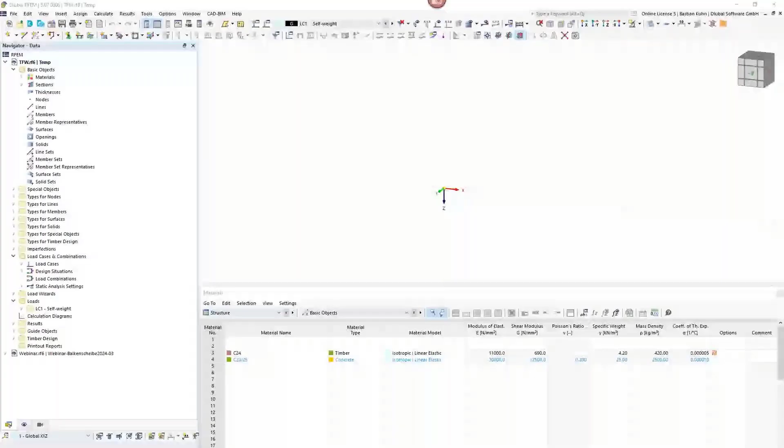Looks quite good. Okay, before I start modeling this timber frame wall, just as information for you, my colleague will probably share the link with you. The model I'm doing here has been analyzed and calculated by hand on our knowledge base.

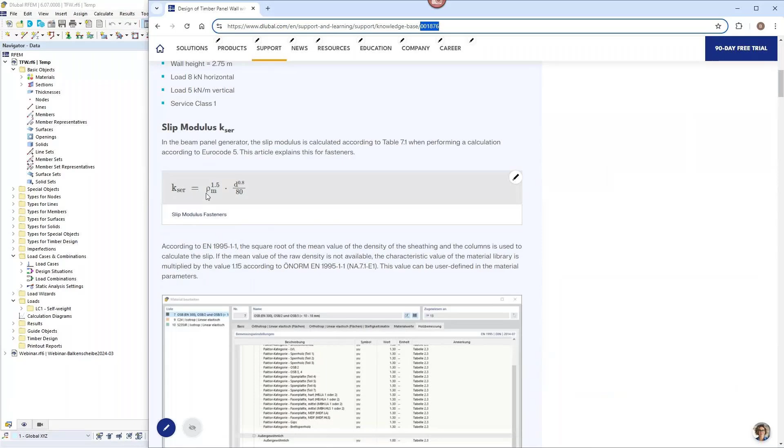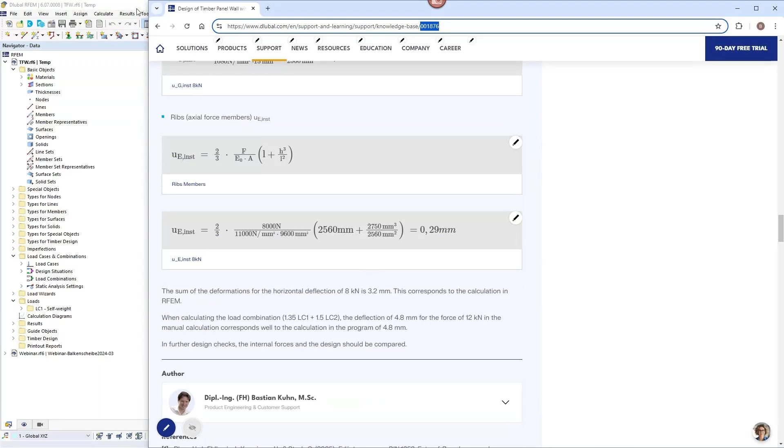You can find it by the number 001876. There you can see the formulas lying behind it, and also the deformation, and of course the inner forces are calculated with hand formulas or equations. Once I've generated the model, I will take a look back at the homepage to show you what we are doing here.

Before we create the model, we have to give it a model name: timber frame wall. I will choose type of model 3D here. In RFEM 6, one of the advantages compared to RFEM 5 is that every design add-on is completely integrated into the software, not a separate add-on anymore, which has a lot of advantages for speed and design purposes.

So I can choose what I want to build or plan here. What do we want to do in this first simple structure? I mentioned we will create a beam panel, so we would need the multi-layer surfaces add-on. We don't need the load wizard, and we don't really need the combination wizard either, but it doesn't matter. We will do the timber design in the timber design add-on.

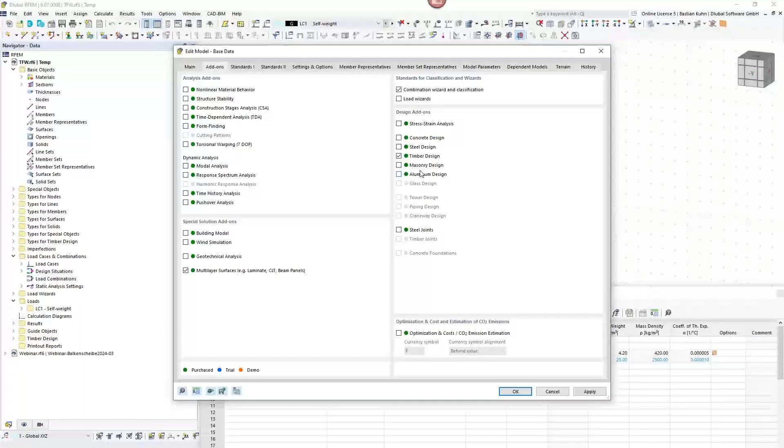Looking at the third register in the basic data, we will have the standards here. We are calculating according to the timber Eurocode, and it's also possible to calculate according to the American standard, Canadian, and a whole bunch of others, even Chinese is possible for timber design.

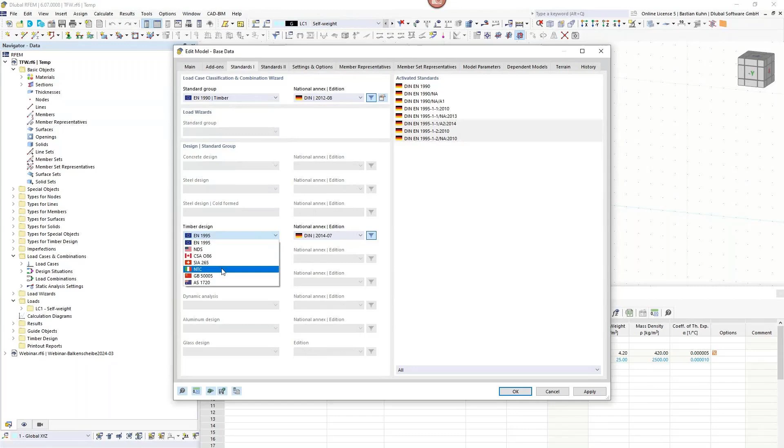For timber design, we will choose all the national annexes available for Europe, and it's quite similar for what's possible in America, Canada, Switzerland, Italy - which has some special rules related to Eurocode but a little different - Chinese, and Australian standards as well. All the other options are not relevant for this quite simple model.

We start and create the surface or the wall, so we create a new thickness. Starting similarly - I don't know if you've ever worked with our software - but also when you created a CLT wall or floor, cross-laminated timber, you can start with just a concrete material.

That's what I'm doing here. Any kind of thickness doesn't really matter. I just create it for drawing the structure and how it's going to look like.

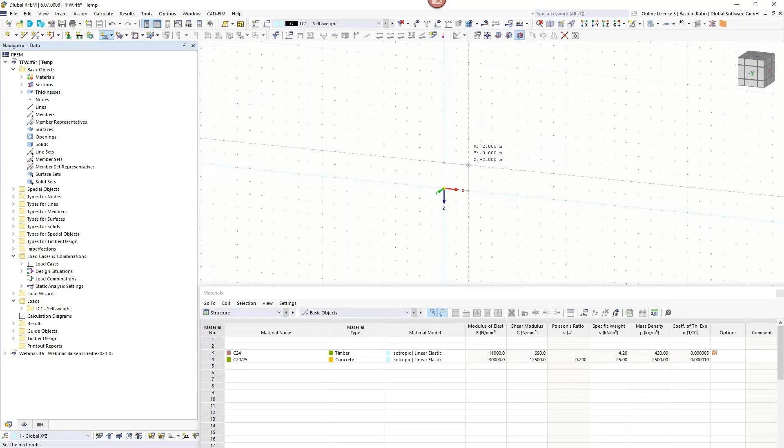So it has a size in X direction of minus 2.56 meters. This is now a theoretical example, and I chose this distance of 2.56 meters. I can maybe also add a little dimension line just so you see it here, maybe in the other area.

Of course, for timber frame walls, you have a standard distance of each beam in the panel of 0.625 meters, so 62.5 centimeters, which is the standard design. In America with inches it's a little different, but we're doing this according to Eurocode. I will show how to change it for the relevant parts of American standard, but the main purpose here is Eurocode.

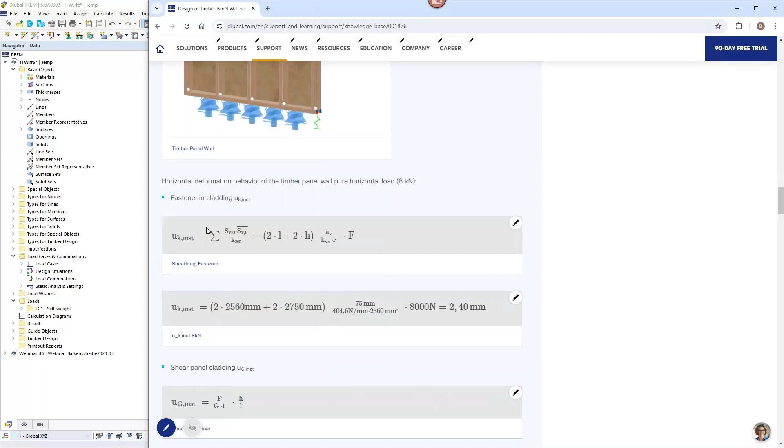Just to get back to the homepage again, here are the calculations by the author, the hand calculations, also based on the Eurocode. You see in this picture, because of the distance here, I get exactly 5 beams side by side into this structure. Just an explanation in case you ask why I chose such a distance.

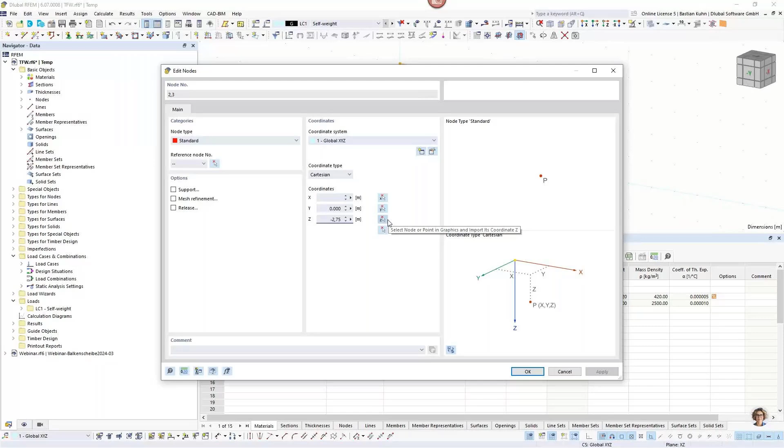I want the height to be a more European standard value of minus 2.75. Then I will add supports: the first support should not be movable in X, Y, and Z direction, and also no turning, because in this case it's a 2D position. I will put that at the origin in order to keep it statically determined.

I will also just move one support on the right side. In the bigger model that I'm going to do just after this simple model, you would of course do a complete support underneath the wall. That's for sure, it's just for this first example here.

So this one is moving, okay, and so that it's not flipping outside of the plane in Y direction, I will define it for the translational degree of freedom in UY direction.

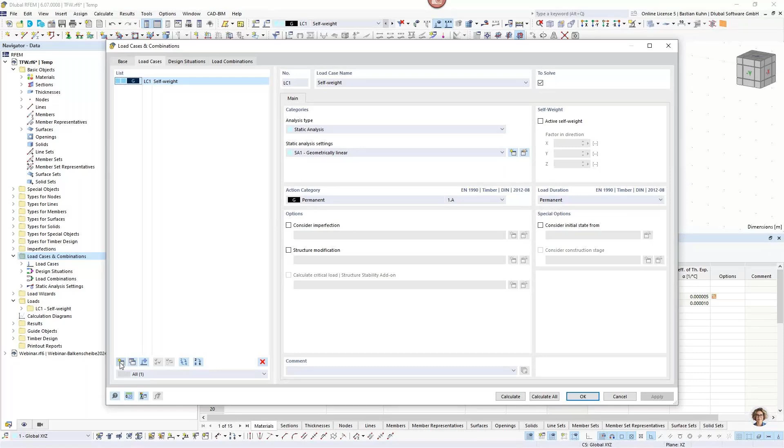I will put a line load for the first load case of a value of 5 kilonewton per meter, and go to load cases and combinations and create a new load case for the wind. I deactivated the self weight just so it can be compared to the calculation by hand.

And here's the wind, and I'm directly assigning a load combination here manually. That's what I mentioned at the start, that I even don't need the load combination wizard here, as I'm just typing it for this simple model. Once again, in the bigger example right after this, we have used the combination wizard.

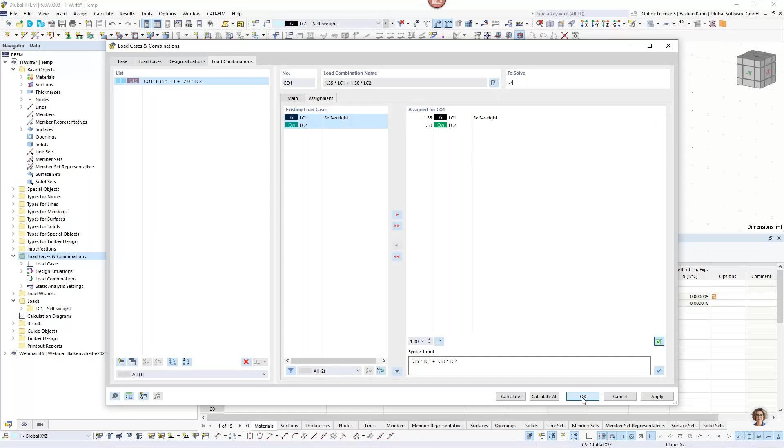Okay, just typed it all, and then it's there. So this is the combination that we are designing. But of course, I forgot to define the horizontal load from the wind.

This is going to be a force of a value of 8 kilonewton, and it goes in X direction, minus of course, because I want it to be moving in this way. But so far this is still a concrete wall, which we don't need.

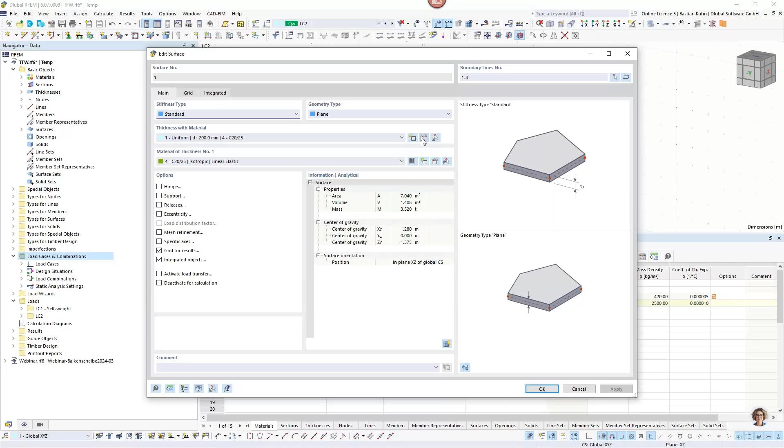And how are we going to change it to a timber frame wall? We double click on the surface, and yes, we'll edit or create a new thickness. In this case, I'm choosing to edit this thickness.

Now that I've activated the multi-layer add-on, I can choose the layers here. If maybe I want it as a CLT wall, then I would have done it this way. But in this case, we want a shear panel, so that's the thickness type for the timber frame walls.

Not even pure timber frame walls - you will realize it when I'm in the material database via this library book here. So now it's predefined OSB according to either American, Canadian, or European standard.

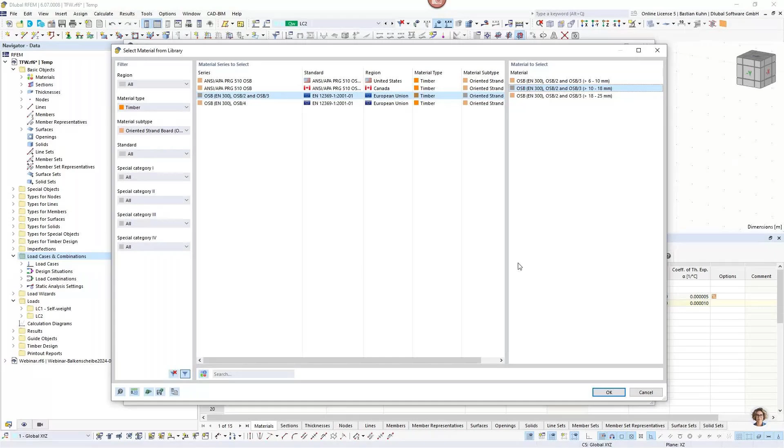For our example, we would use 10 to 18 millimeters OSB. But if you use the drop-down in here, you can also use gypsum, for example. Even for timber floors, at least here in Germany, what's used quite often are the Fermacell gypsum fiberboards in order to stiffen out your structure. So that's quite an economic way of creating your walls.

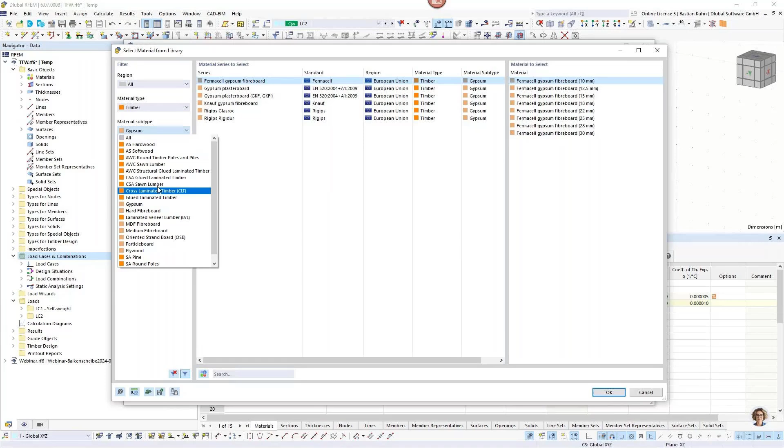So, yeah, I mentioned it here.

I would choose OSB. I can also show you just as an imagination how you would do it with the American standard. It works quite simple, similar to what you choose. I just have not switched my dimensions to inch, so it's rather hard recalculating the 0.5 inch because thickness needs to be defined here additionally.

So this is what we will probably better be choosing by the European standard. We have to change the material into orthotropic for this type of thickness, and I will define 15 millimeter thickness in here. All right, so that's the sheeting.

I also can make the planking from both sides. I can vary it, so it can also be unsymmetric. I can even say the sheeting on the other side is made from a different material than OSB. For example, if you are using some insulation material, and this has also some capacities for stiffening out your structure, so this would also be possible to be defined. So the material can be different on front and back of your beam panel.

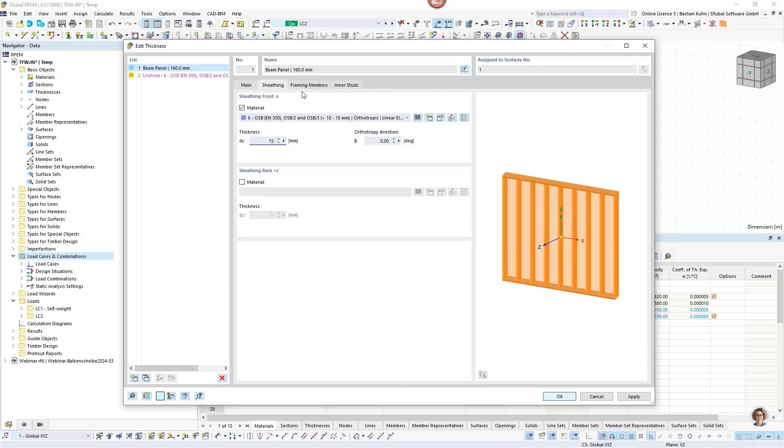Okay, so this leads us to the framing members. Here, that's the usual material section database that you can choose here. Sensible, of course, is here only the rectangular one, but just as a notice, it is possible to choose and define any kind of section here. It's just for this case, I'm using a 6 centimeter by 16 centimeter board or beam inside, and this is the most standard way to do it, and that's what I'm going to do for this example. These special selections I will show in the bigger 3D model afterwards.

Then you choose the connection type. You can have nails, staples, or user-defined slip in here. And when we choose staples, for example, with the dimensions of 1.5 by 50 millimeters, you see that the stiffness is already calculated in here. We're choosing a spacing of 75 millimeters.

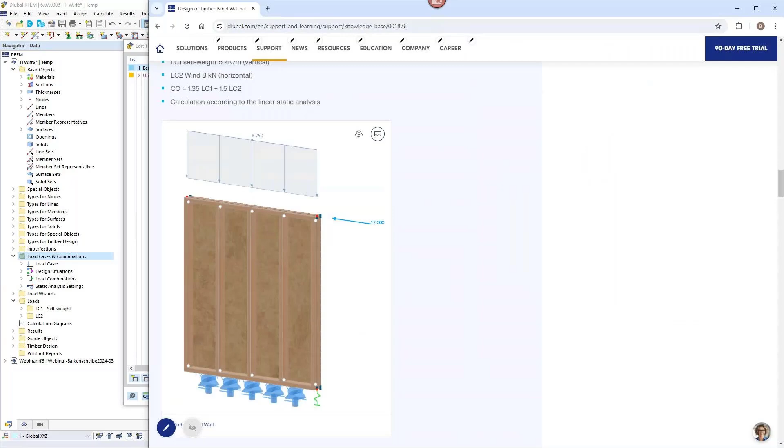And when we compare it, I hope it's the last time I'm switching to the homepage. If you look into this here, you see how these equations or how these values are calculated in here, with the slip modulus from the mean value of the beams and the planking. Okay, so this gives this value.

It would also be possible to consider the connector stiffness just in one direction, so then you have it just in X direction and the Y direction will be 0. I will also show what that means in the generated beam panel. That's an important info that you should remember once we generated the beam panel. So the point what I'm showing you here is this is a generator to generate the timber frame wall in the big program RFEM. Okay, then we have the inner studs in here.

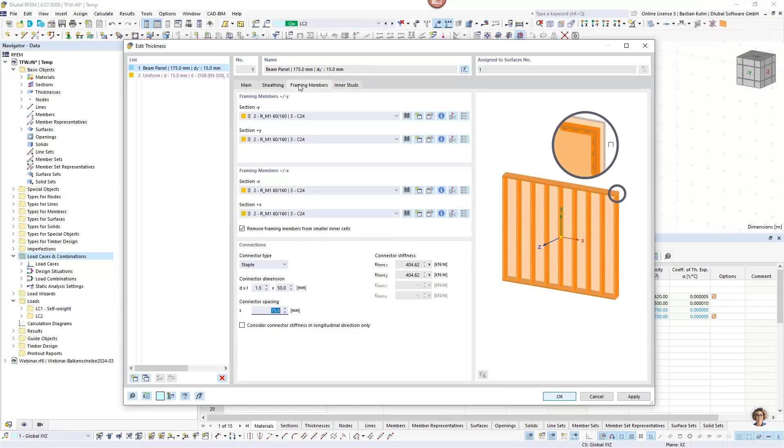Then you can have several other sections in here, similar to what I showed you when I was working in the framing members. It counts here vice versa. You can have IPE profiles if you want. For example, if you have a very high vertical load and you say, okay, in one special part of it, I want an IPE, then you can say create any distance in here, 1000 millimeters for example, and create an IPE. So that would be possible to also be defined.

All right, but here, for this example, we are choosing center to center and the spacing that I already mentioned, 625. This offset and what it makes, I will also show in the bigger model afterwards. But what I'm choosing, similar to the definition before, is 1.5 and 50 in here, and the connector spacing of 75 millimeters. So then I press OK.

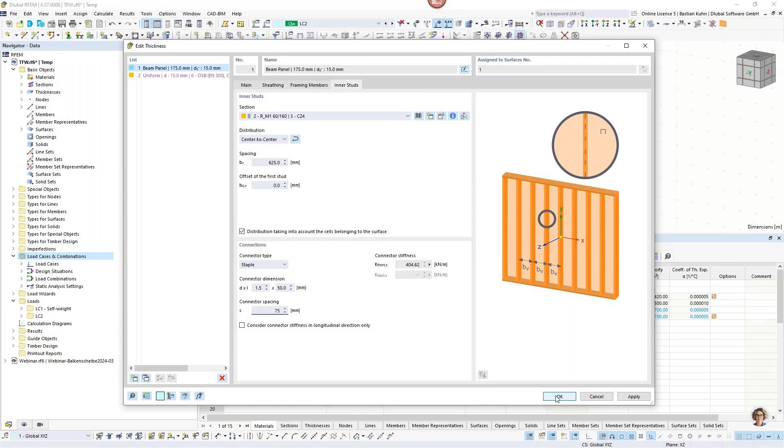And one more time, OK. So nothing's changed. Surprise. Why is nothing changing so far? The answer is because I have not shown the beam panel.

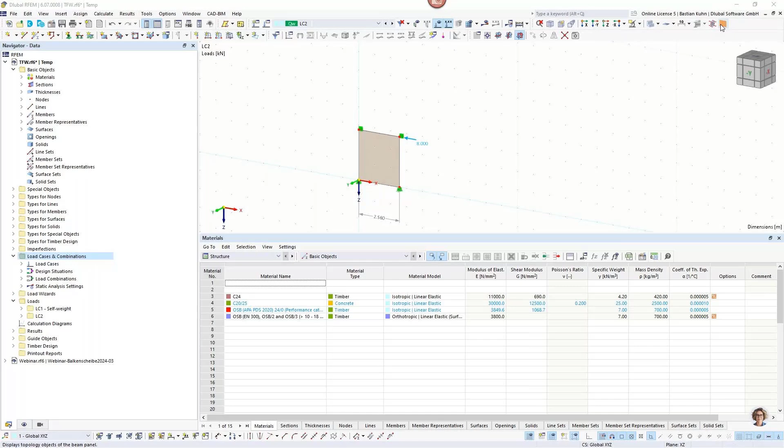What our idea is from creating the beam panel, or for developing the beam panel, is that you work with, as you are keen to it, as you know it, with surfaces. And then inside it, you generate the beam panel. And when you now activate the beam panel, you can see that it's generated in here. So here is the top beam and the bottom beam, and also the posts. So we have 5 posts in here, but that's obvious because of our distance.

I maybe can switch on photorealistic visibility a little bit just to give you maybe a little bit better imagination of what it's doing.

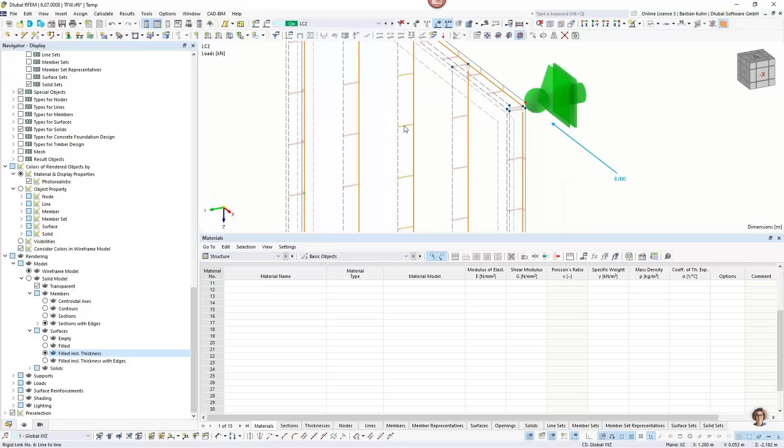I hope that can be seen this way. So you see the OSB is eccentric, moved to the outside. It is connected with this little pin, now I'm switching the rendering off. It is connected with these little pins in here, which represent the staples that we have. When we double click on one of those pins, you can see that there's a rigid link defined, and it contains the stiffness that we generated in the beam panel.

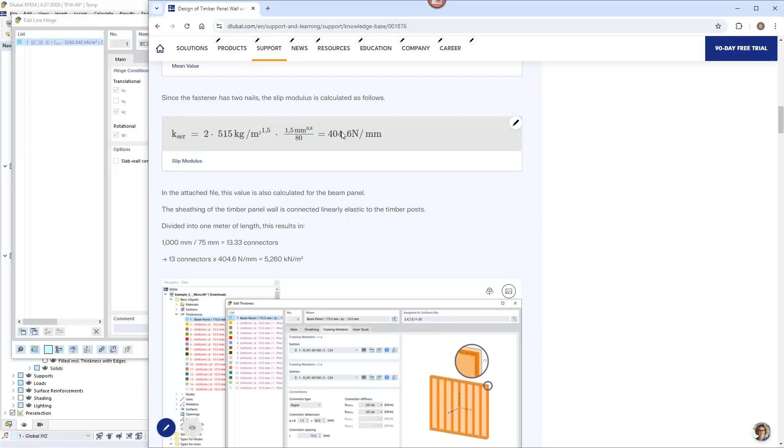I promise not to show the homepage anymore, but I'll do it just one more time because it's good to have it seen here. If you remember, I had defined a spacing of 75 millimeters, calculated on 1 meter, which gives you 13 connectors. 13 connectors via the calculated slip modulus gives us this value. So this is done here.

I also told you we should remember this longitudinal stiffness, where if I had chosen just to have the stiffness in the UX direction, my UZ value would be 0. So that would also be possible.

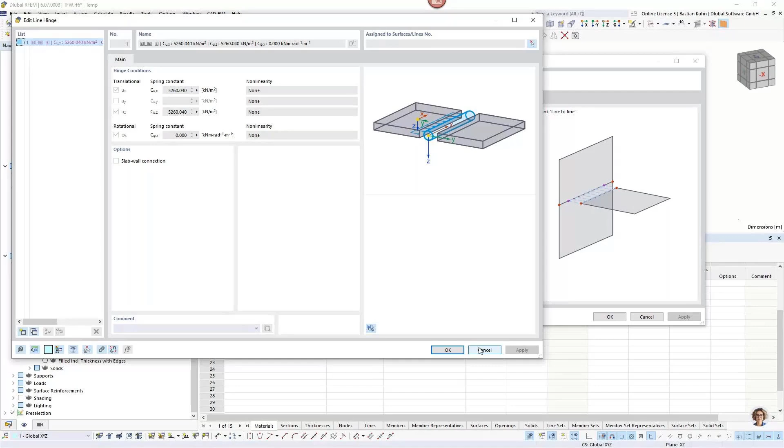This is the generated hinge, and it's generated once again between each beam and the OSB planking. I will put the rendering on again. So here in this way, it's probably better visibility.

Okay, so now we want to see results of it, of course. I did not mention the FE mesh. That is something we maybe should have looked at before, but yeah, we can calculate it.

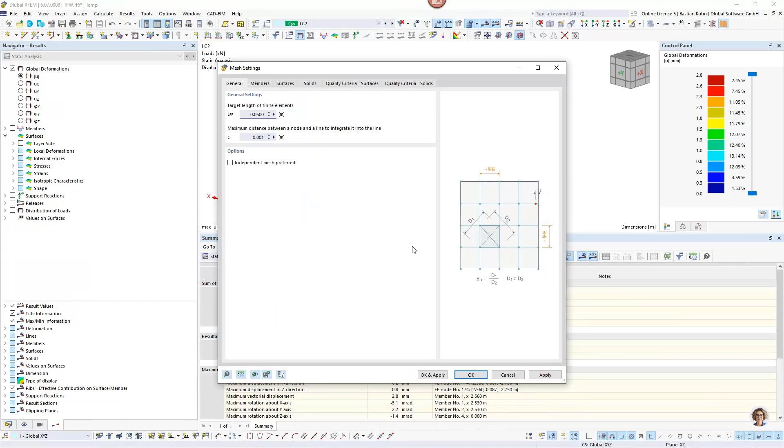Once again, I'll get the rendering off, and you see that the FE mesh in this case is nonsense. So we have to go back to the FE mesh and make it a little finer, with 5 centimeters, which is maybe too fine, but for this example I think we can do it just to compare our deformations and inner forces.

And maybe also the reaction forces, because actio should be reactio. That's what I learned in my studies.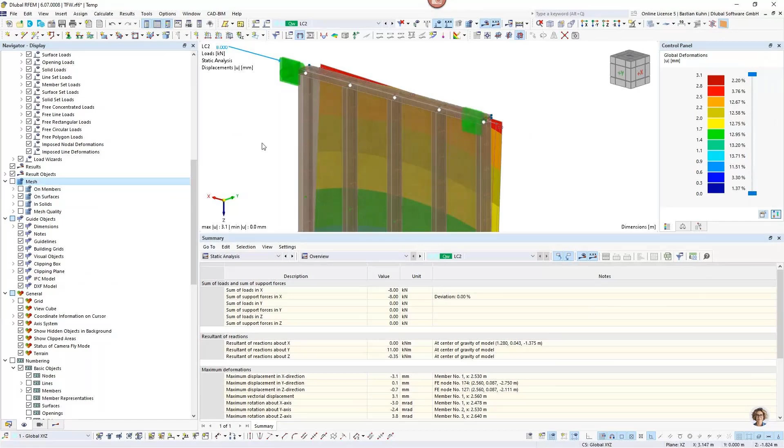Alright, so you see that the FE mesh is now fine, maybe too fine, but it's good. We will leave it this way. And we have a deformation of 3.1 millimeters, and reaction forces - yeah, actio, reactio, that works.

We have a little bit of forces here because of the eccentricity, but I think they can be ignored in this case, which gives us a little bit of changing inner forces, but not that much. This is the deformation that you would also calculate by hand with this simple formula.

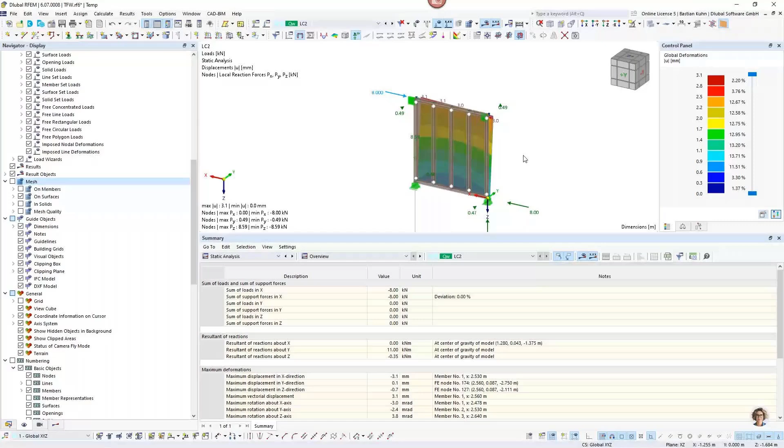And then now it's actually done. You have the stiffness correctly assigned, so that's all working. Of course, we did not design the timber frame wall. So how would you design the timber frame wall?

This I can also show you via our new - well, it's not new, but in RFEM 6 it's new - the so-called member representative. So if I'm choosing here member representative for the posts, what do you verify for the post? The buckling, of course. Then you would say, and the advantage of the member representative, in case you have not worked with this in RFEM 6 and don't know this...

In former times you would have to choose all the posts and edit them and work on them one by one. This is now not necessary with the member representative, because every member that is similar to the other one, which is the case for posts in timber frame walls, can be summarized in the member representative. So you just do it once, and in former times you did it several times. This is one of the good advantages.

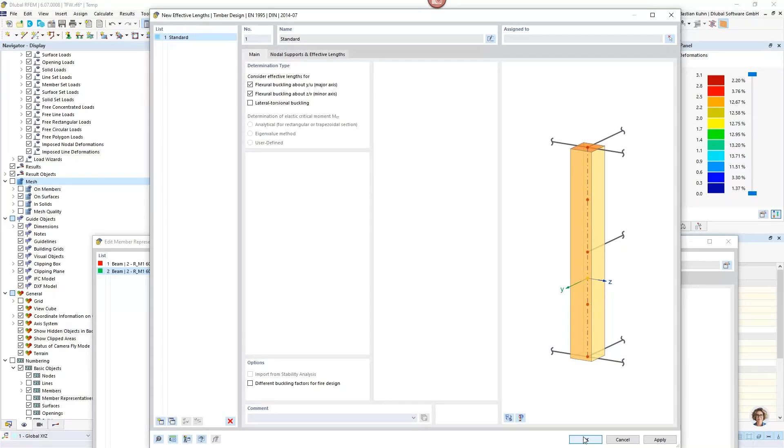And then, of course, effective lengths - we do not verify lateral torsional buckling. We even do not need to verify buckling about the minor axis, because that is covered by the planking or by the sheeting. But just for sake of completeness, we are verifying it.

Then we switch to the add-on timber design, which is right here in the drop-down menu. Once again, it's one of the new advantages of RFEM 6, that you do not have these add-ons on the left side anymore. I mean, you have here the register timber design, but it's more about the columns because it's completely integrated into RFEM 6. Okay, what do we verify?

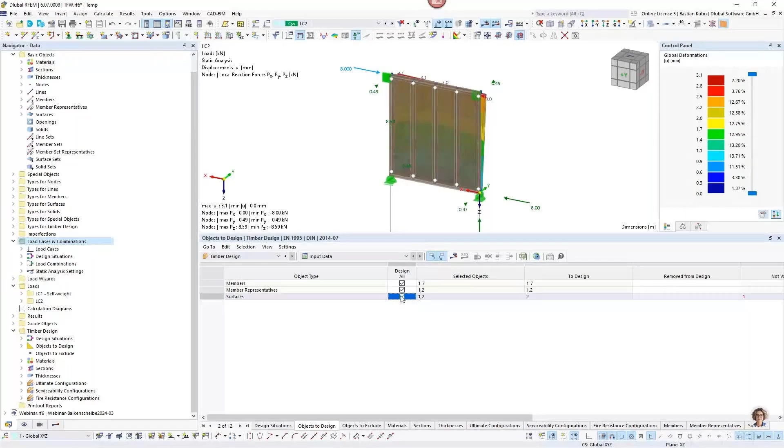We want to verify this member representative that I just showed you. So that's member representative 2. And then we calculate it and look for the results.

As I said, what we want to verify here is buckling. Pressure against lateral to the grain for the downstand beam is also possible, but it requires the definition of an additional beam. That's why I'm skipping this, just as information in case you ask yourself this question. You see stability works in both directions, and we are very proud about how these verifications are shown now.

Here you see that all the equations are there with nicely written formulas, and of course you get the slenderness ratio and the buckling factors, and this can directly be put into the printout report and is your documentation of the results calculated here for the posts.

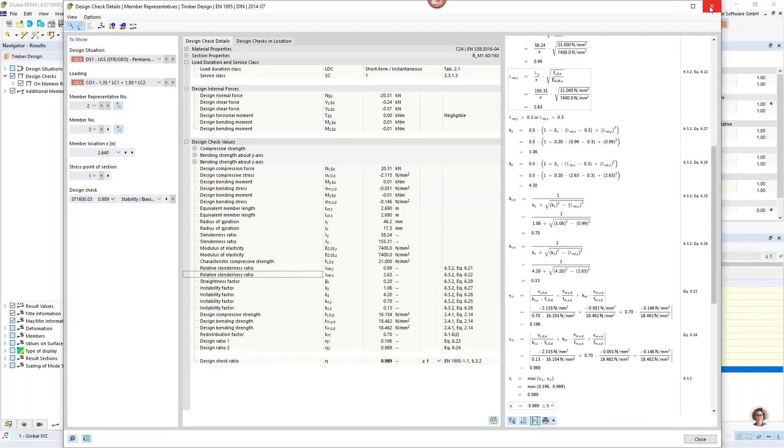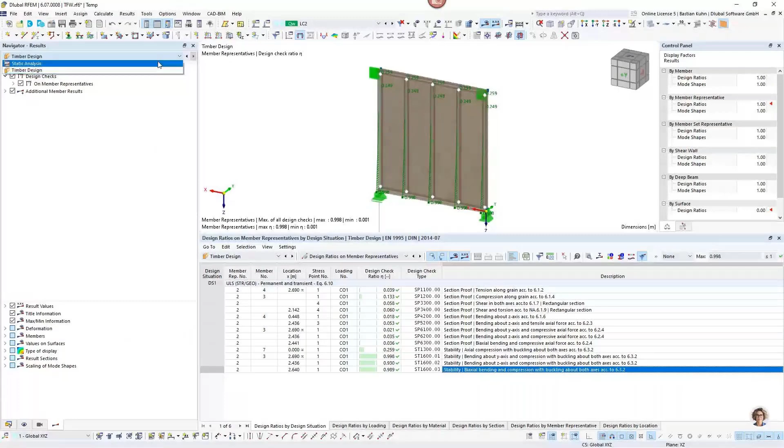The connections inside is also the most important verification. It must be done by hand, but there are methods and ways to help you calculate that, and you can take a look into navigator results, static analysis, releases, and then line hinges and forces. Usually the value that you need, we'll switch off this one and also the rendering once again.

So you see in here, in the middle there's nearly happening nothing, it's rather a constant value. So when you are very much on the safe side, you would calculate your load bearing capacity of your staples in this case, and compare them with a value of 3 kilonewton per meter, or you could also take the middle value of it.

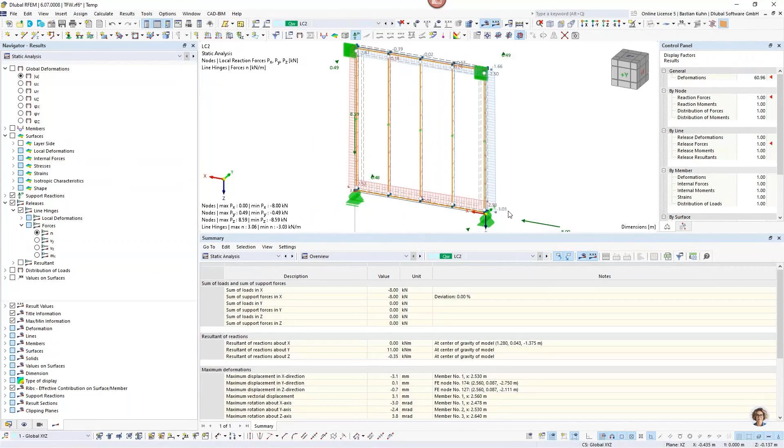This is what the software gives you, and we're working also on designing them. Of course, this will also be possible quite soon.

Okay, this is the simple model. In case there are no questions unanswered...

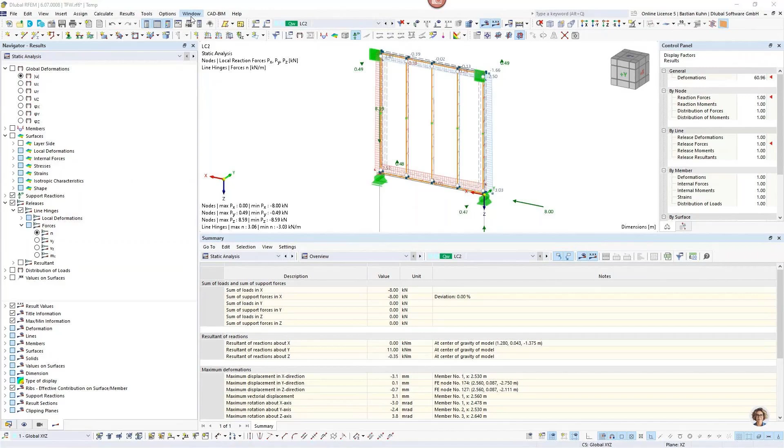There is a question: what about the possibility to add openings? Yes, that's what I'm showing you now in the bigger model. That's a good question and leads us to the bigger model. Therefore, I'm closing this and switching to the bigger model.

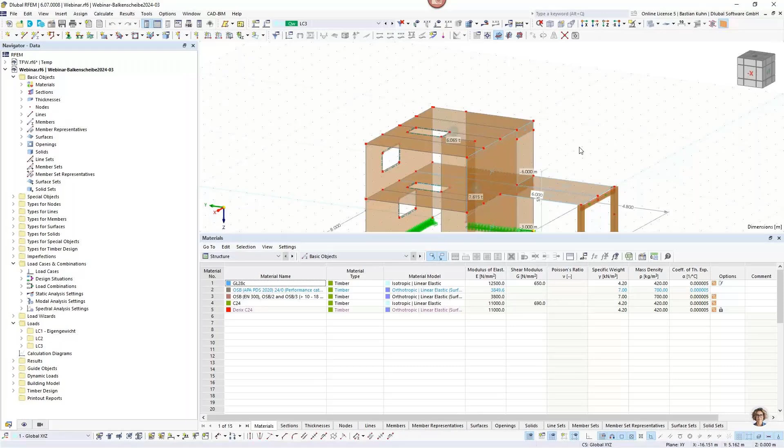It is a house that I've probably shown here for 10 years or something like that. So if you take a look at the historic structures, this is something I probably showed 10, 15 times already. It is completely made from CLT.

Here it has a little balcony. It has a length of 8 meters, width of 10.8 if you include the balcony outside. All the CLT plates are connected with hinges here, and also on the wall they are connected with it, not the surface.

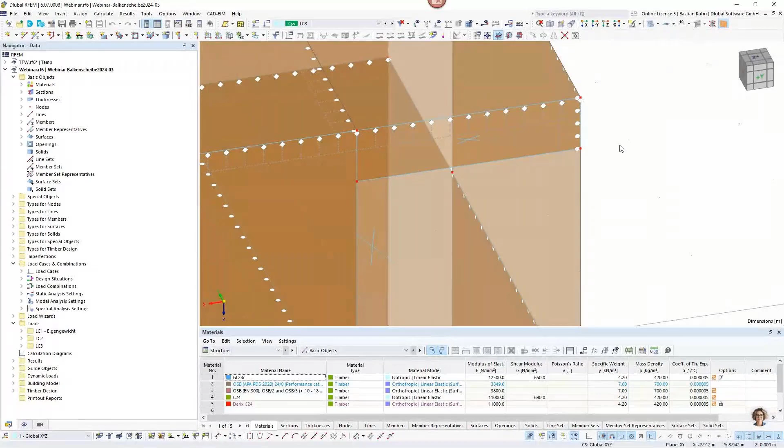I wanted to take a look at the line hinge. Here's one here. Okay, so there should actually also be a slip in X direction, and it's similar to what I showed you in the smaller model before. Then you get the forces in the line hinge and have to compare them with the load bearing capacity.

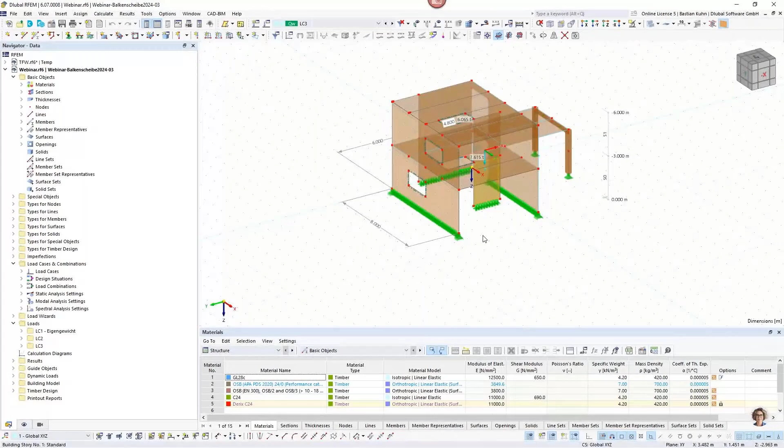Okay, so now this CLT building has openings here, of course, and I want to change maybe this wall and also these inner walls into a timber frame wall. Before doing this, what you would have to do in order to regard the opening is to separate this surface into several surface cells.

For this we have a new function called extend trim line to next member line. So we say okay, and then you see it's divided here, and I have now these surface cells. Surface cells are a quite new object in our software, useful on a whole bunch of elements, and we are using it now also for the beam panel.

You probably know, at least when working according to Eurocode, that for the timber frame walls there is a simplified approach according to chapter 9.2.4.2 or something like that. Don't quote me, I'm not 100% sure which chapter it is, but it's 9.2.4 something. And this is for a hand calculation.

What would you do when you calculate such a structure by hand? You would calculate your horizontal force, and then say okay, this surface cell will bear this horizontal force, and this surface cell will bear this, and I need hinges here and here on this point, and I'm totally skipping the elements in here.

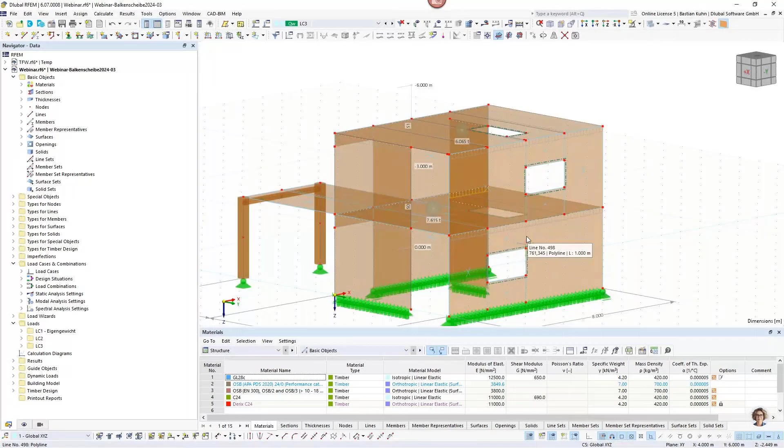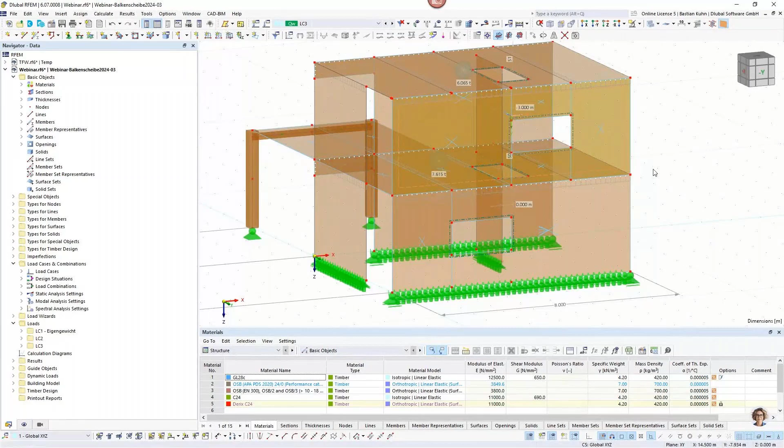Maybe what I could do is delete this one and divide the surface, the bottom surface, here at one point, just to show you what you can do regarding slip and what you cannot do, and where the difference is to the top, where I'm still having one continuous surface. So I go right click and say divide surface with intersecting lines, and now it is divided. That's quite simple, and I'm just doing it on one side for demonstration purposes.

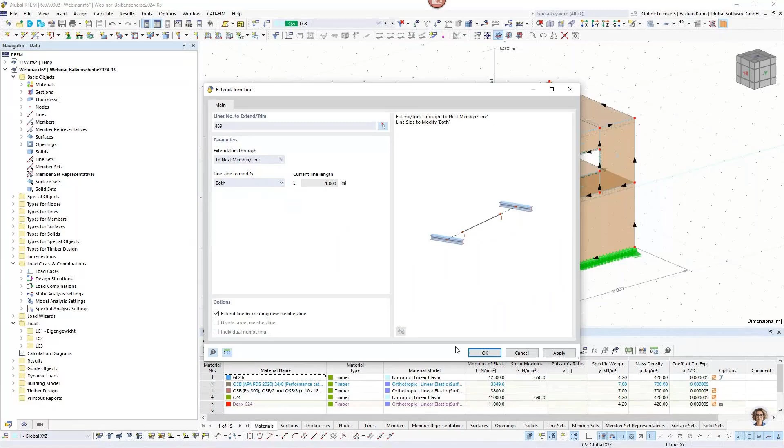So extend via copying, here I'm leaving the cells. I'm quite curious what's coming out of this, because I've never tested it before.

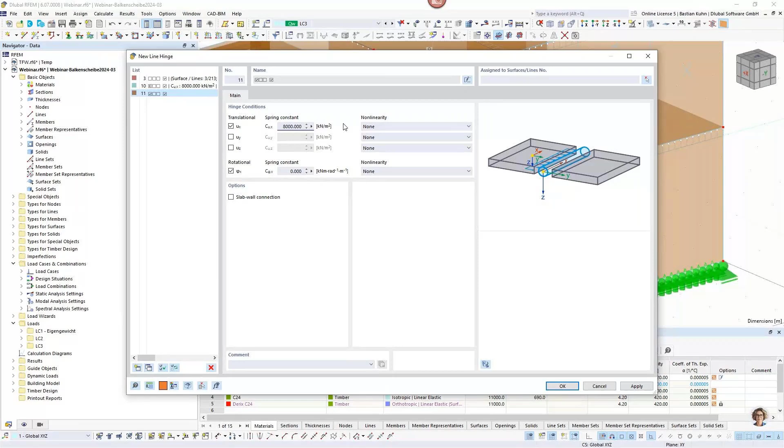I will insert now an object line hinge dialog box, give it also my favorite slip of 8,000 kilonewton per square meter, and say okay, here and here... and here I'm having the slip. That's quite similar to what I've done on the walls, on the CLT walls.

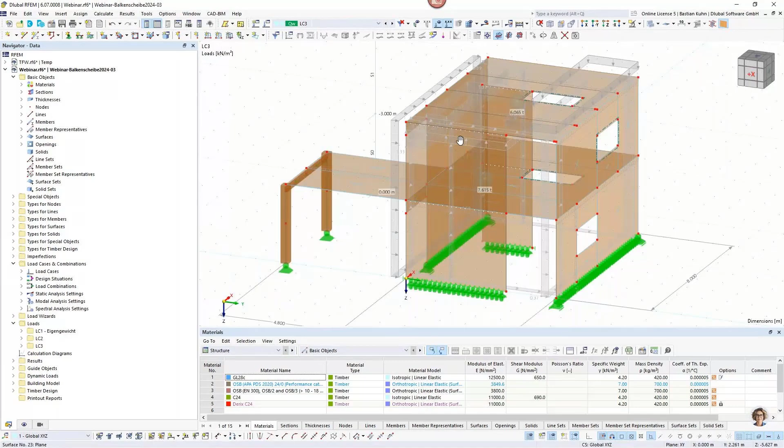Sorry, I forgot to mention the load. So we have self weight here, quite simple, 1 kilonewton per square meter over the complete balcony. In load case 2, I have 1.5 kilonewton per square meter. And in load case 3, I have generated the wind, with the wind load blowing on the building from the front of it, so that's where I'm stiffening my structure, just for your information.

And of course, I choose an automatic load combination and generate all these load combinations that we are using here. Okay, so a lot of words I said.

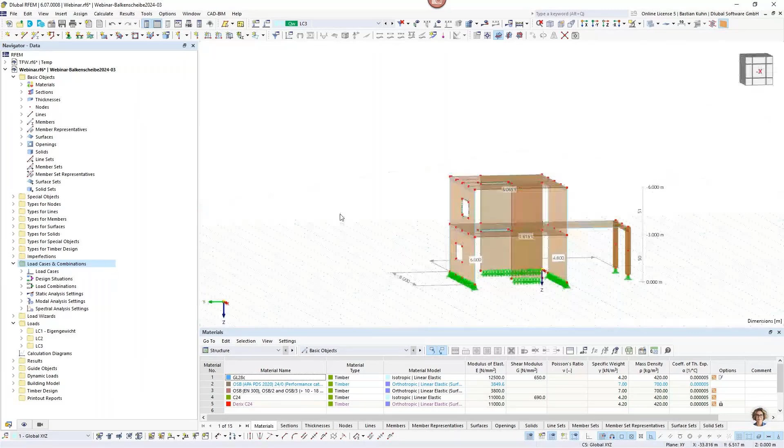Now I can go and display our relevant walls, these ones, and go into the selection, define edit surface, and choose the beam panel we just defined.

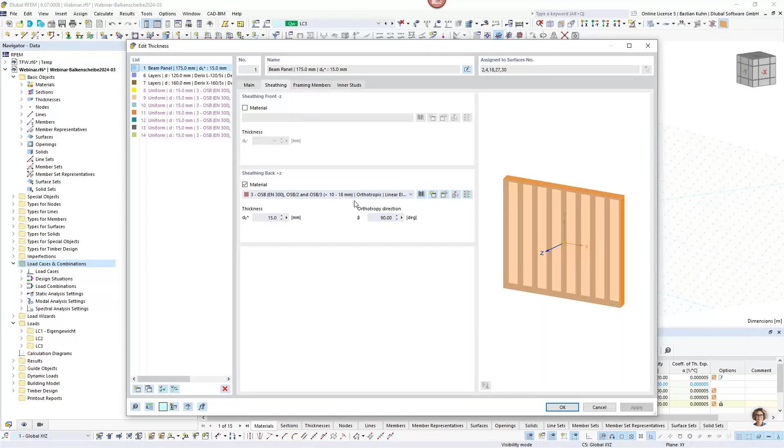I will go to the edit dialog box. Just once again, I've changed the sheathing on the other side, but then it's quite similar to what we've done before. Framing members are the same, and oops, sorry.

We're using also staples, and I'm keeping now the removing of framing members, and also the distribution, and this offset here is by 0. So then I'm generating it and press OK.

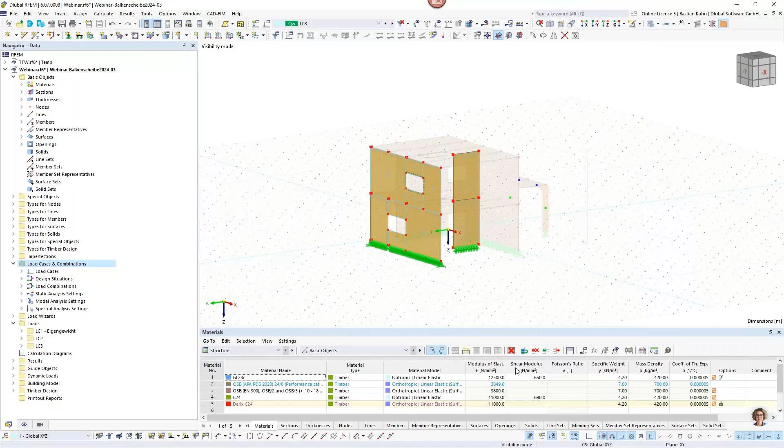And then you see that this one is generated here. This one's not there — there was a small problem. Yeah, I should have...

Sorry, no, it's not working because I have not divided it. I said I would be curious what's happening because I never tried it. I probably should have tried it first — then this would not have happened.

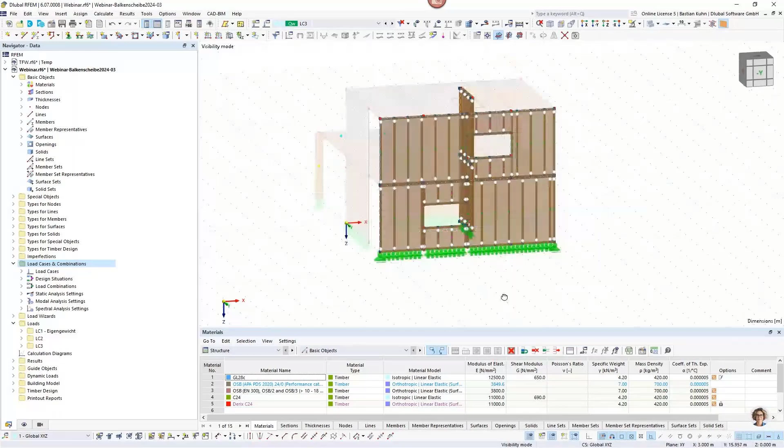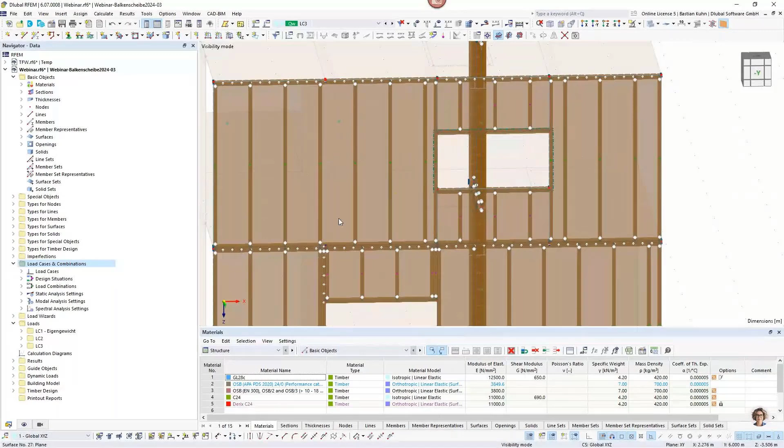But anyway, okay, so now we look at the top floor, the top wall first, and we see that the distribution of the beams and posts is quite good. We would calculate the opening, and it kept our spacing of 625 millimeters in between, and here we have a middle value of 100 millimeter left, which is also good because we can still get insulation into it.

But yeah, I said it — what I wanted to show you is what this special selection does here. So if you remember this, this is a post coming down here, and if you do not use the remove framing members from smaller inner cells option...

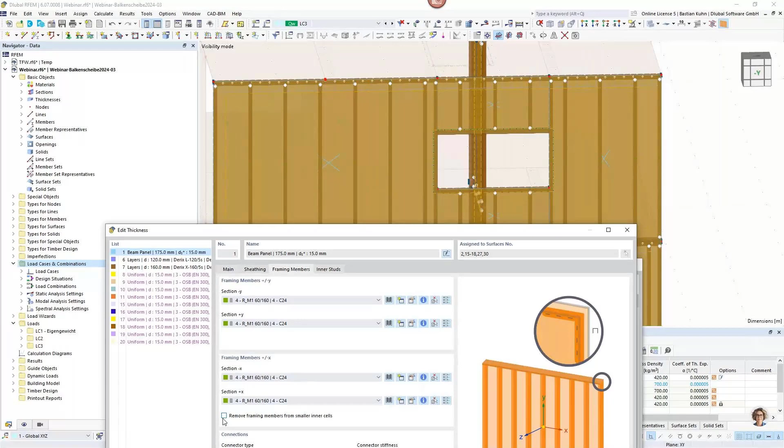Choosing apply, here then you would — I hope it can be seen because it's highlighted now — but you see there's now an additional post which makes no sense. So this is actually what this selection does here.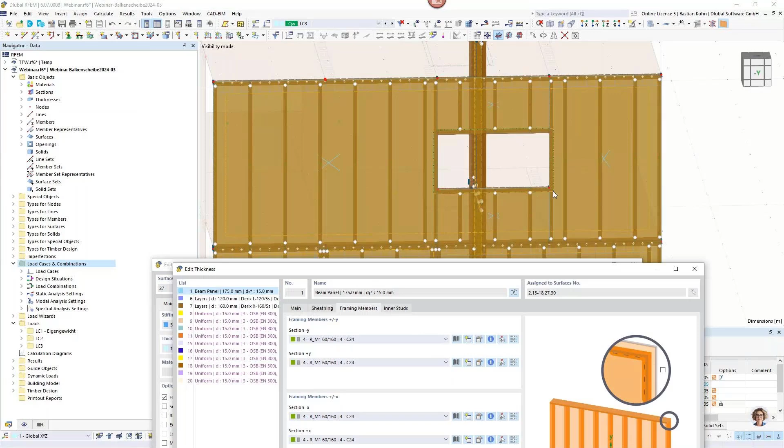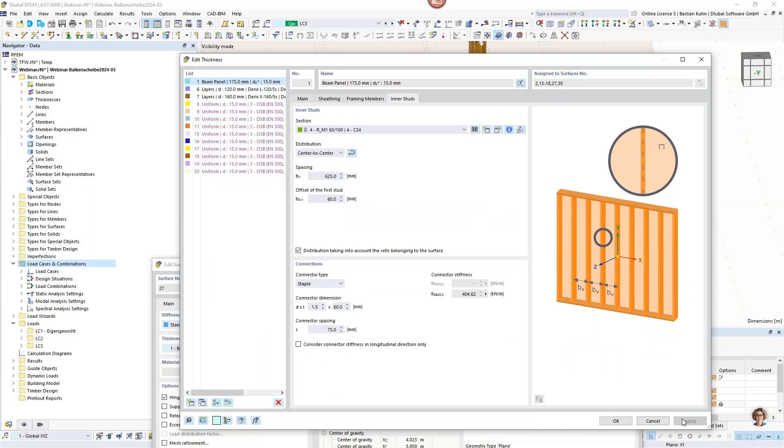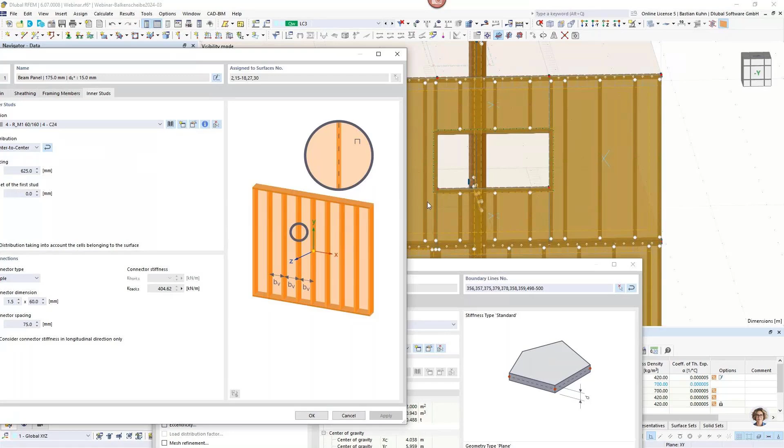In case it doesn't fit, or you want a bigger distance, you can use this offset for the first stud. I don't think it makes sense here, but if you want, you can choose it, moving the first stud by 6 centimeters. Let me show you - so you see here I have 6 centimeters less, and then I can put more insulation. This is how this works and how you can assign that.

Now, when we talk about openings, the point is - it's in Europe, I don't know how it is all over the world, but in Europe we have special rules for what you can do on such bigger openings. Maybe you also have a complete door going to the bottom, or a balcony on this side - you can imagine 100 variations of it.

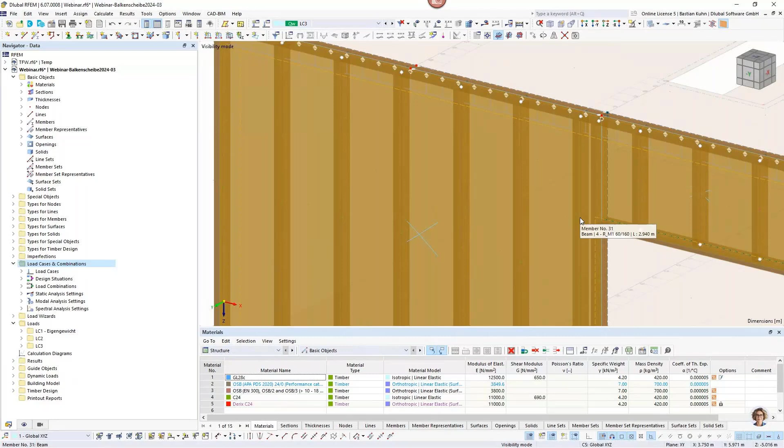What we do here in Europe is use the top beam, or header, on this window and move it to the next stud. That's one of the possible constructions, and then it's completely shear stiff, and it's nailed on every part wherever our OSB plates connect or come together, and there's always a beam or a post behind it where it can be nailed on.

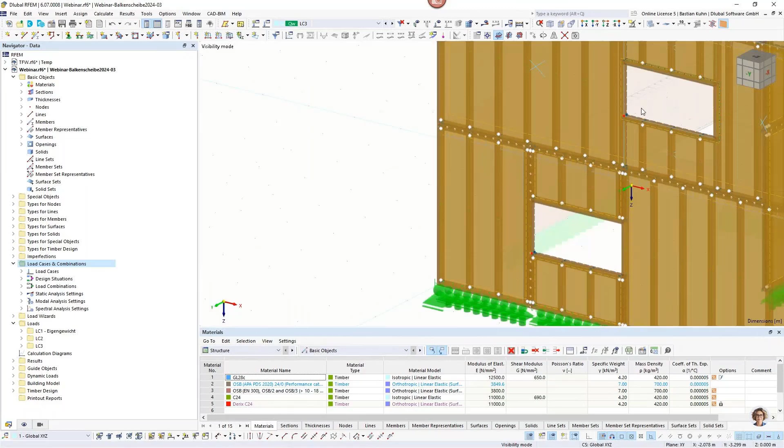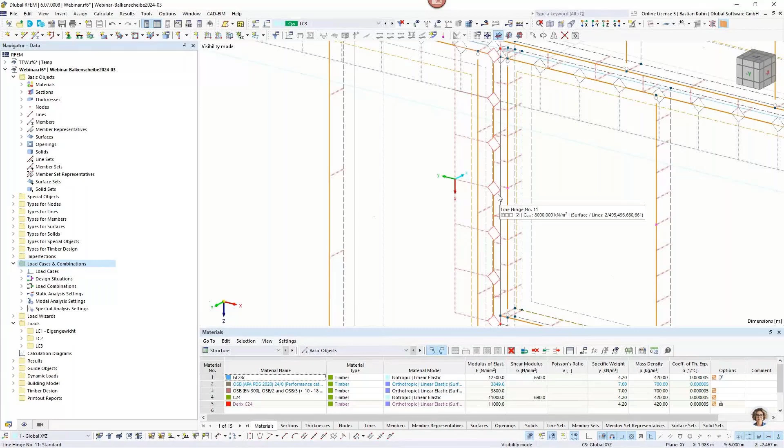Or what I did here in the bottom, and that's what I mentioned from the start - if you want, you can connect the beams, and then they have a slip in between. The slip is what I showed you in the first example, between the OSB and the post, and between those two timber frame walls. That's the way how it can be connected.

It's maybe a little hard to explain, but after the webinar, download the model and take a look at it - then I think it should be quite easy to understand. Why is it not calculating?

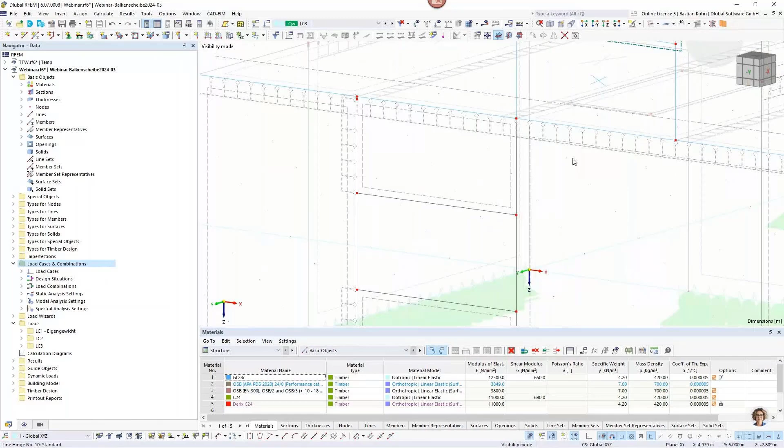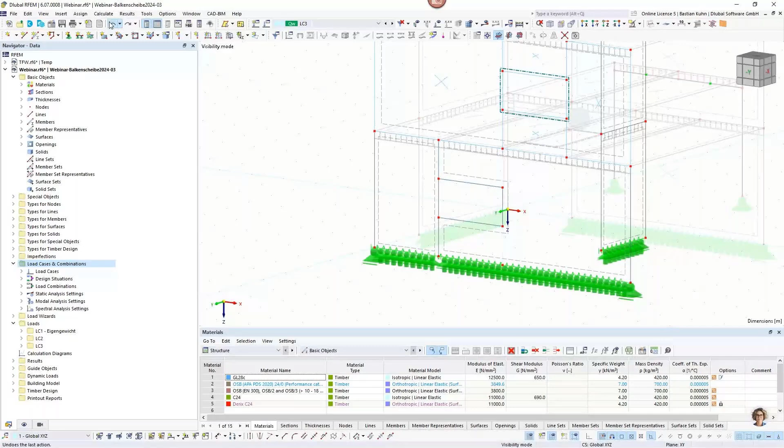Just hold on, we don't necessarily need this. That's strange, okay, wait - maybe I will not get it going. Hold on, we will get rid of this. Maybe we will not divide it. Go in here - maybe this was the reason for it. Okay yes, I know it's still intersecting. So in here, and now if we do it again - oops, too quick, sorry.

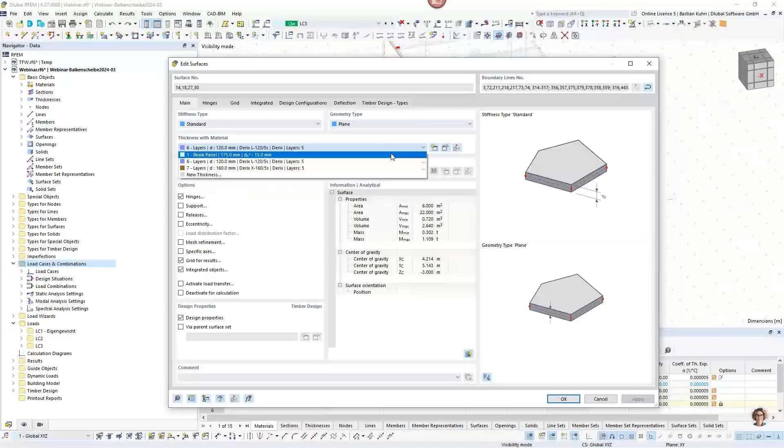Up and here, edit, and choose again the beam panel. Why is that now? I forgot this one. So we need to extend here - one more try, and otherwise I'll leave you without the results of it. But I think it can work. Yeah, should be.

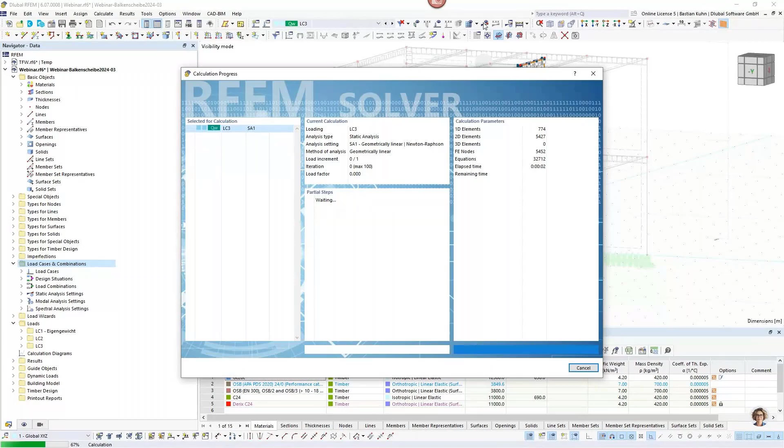Okay, it's not a real small structure, not even a big structure, but yeah, I also use the building model inside just to get my masses all around. So masses maybe also a good point.

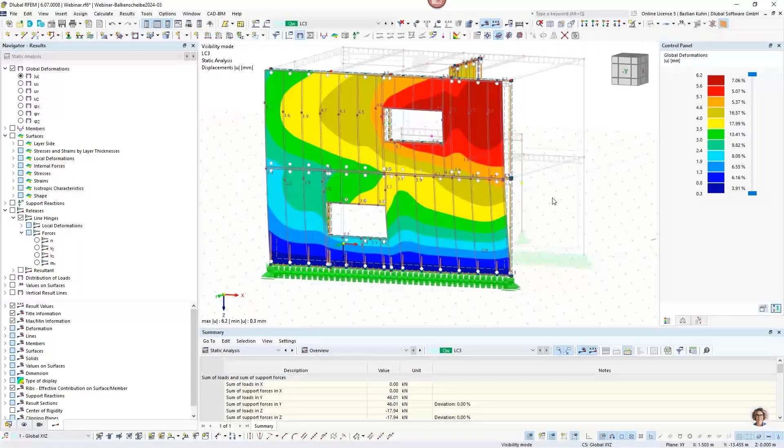One other advantage of using such a 3D object is that you can use the stiffness of the timber frame wall similar to CLT for every calculation, also for your dynamic analysis - you can create response spectra and use it for this. And you see in here, this is now quite similar to what we had before - we have the deformation, the inner forces of the beams, and can do the verification on it.

Okay, that's it, that's all I wanted to show you. Quite a short webinar, I think, but 43 minutes was not that short.

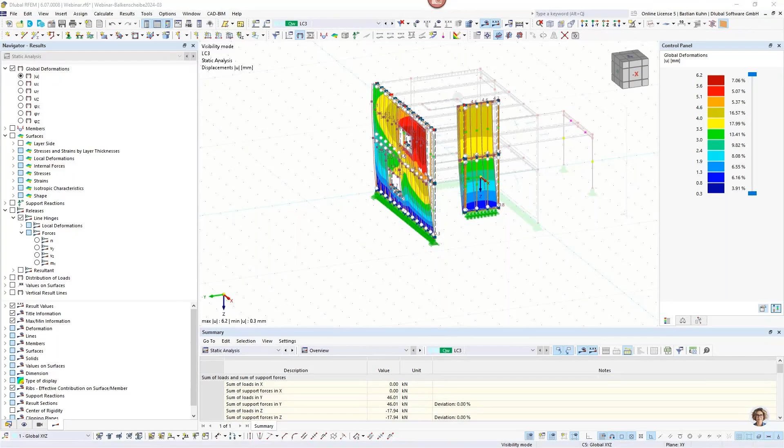I hope my colleague was able to answer all your questions. I'm not so sure - Andreas, do you have something open I should mention? No, I answered quite all the questions. Good, maybe there are newer questions when I take over - maybe you can answer the rest of the questions. Okay, I'll share my screen.